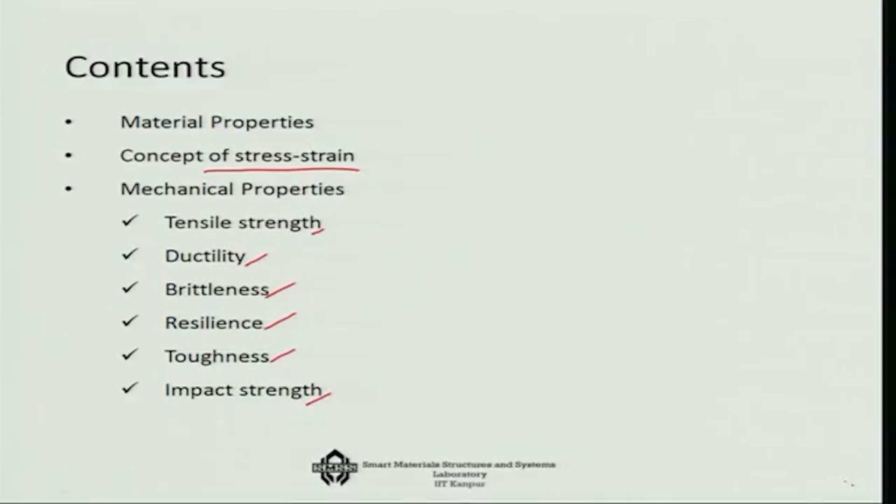So, first of all, let us look into broadly the material properties. In the last lecture, I have told you broadly about the domain of materials. Now, we are talking about the material properties that one has to consider. So, towards that direction, we call it an 8 parameter based grading of a material. So, the first in this direction is, of course, you have to always keep in mind the economic and environmental effect, because if the material is very expensive, then it is of no use for a mass production system.

Just for an example, suppose you need a very high stiffness in a particular mechanical system. Now, diamond is having the highest stiffness, something like 1200 gigapascal. But can I make a mechanical system out of diamond? No. So, that is what we have to keep in our mind.

The diamond is, of course, an extreme example, but the price and availability is a very important aspect in terms of choosing a material. We will cover these things in one of the talks. I will tell you what are the current prices and availability of the materials in the Indian context. So, that is one important point, whether the price is affordable for a particular engineering system.

Now, say for example, you are making a screwdriver or you are making a nail cutter. The type of material that you can afford, in comparison to suppose you are making an automobile, will be definitely of inferior grade. That means, for products like an automobile or an aircraft, you can afford slightly higher grade of materials. So, that is why the price plays a very important role.

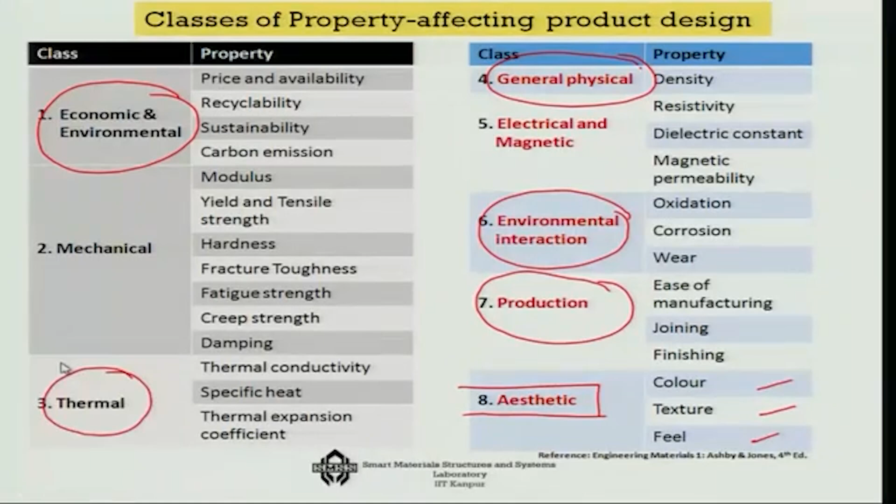So, that is about the overall material properties. Now, let us look specifically into the mechanical properties of the material. There is actually a very large list of mechanical properties, but I have chosen a few of the very important ones which you will need for day-to-day mechanical design: the strength of the material, the stiffness, which is actually governed by the modulus of elasticity, then the plasticity from the forming point of view, ductility and malleability.

One common point that you often come across is that ductility and malleability are not the same. Both of them refer to how you are deforming a material, mainly plastic deformation, but while ductility refers to deformation under tensile conditions, malleability generally refers to deformation under compressive conditions. So, ductility, for example, refers to whether I can reduce the thickness of a wire as I apply a large tensile load. Can I draw a very thin wire from a cylinder? If the material has good ductility, you can draw a very thin wire out of it. So, that is in the context of tensile loading.

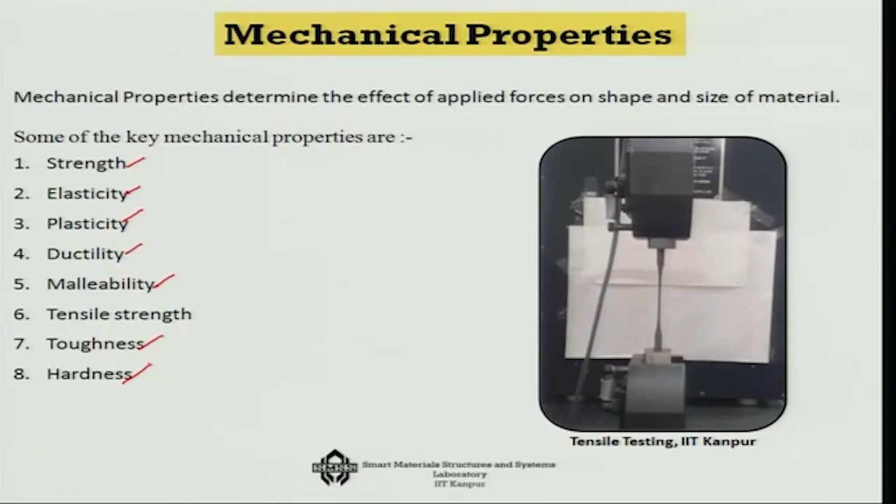Then of course, we talk about strength, specifically the tensile strength, because that becomes important, and the toughness and the hardness of a material. So, these are some of the mechanical properties which we will be discussing in much more details. Okay. So, before I talk about the strength, I should talk about the concept of stress and strain, which is very basic and important for any mechanical component.

Now, the way we will define stress here, which is the very elementary definition of it, is that it actually depicts the internal resistance per unit area in an average sense that acts on a material when you are trying to deform a material. So, for example, if you use a tensile testing machine, then you will be taking a sample where you are actually going to apply the force and deform the material, like you can deform it either in a tensile force system, where you are actually pulling it apart, or you are compressing it.

In both the cases, you have an idea of how much of force you are applying, and you know what is the area of cross section of the system, the initial area of cross section of the system. So, in an average sense, the force per unit area will give you the stress. Now, actually the SI standard unit is Newton per square meter for stress.

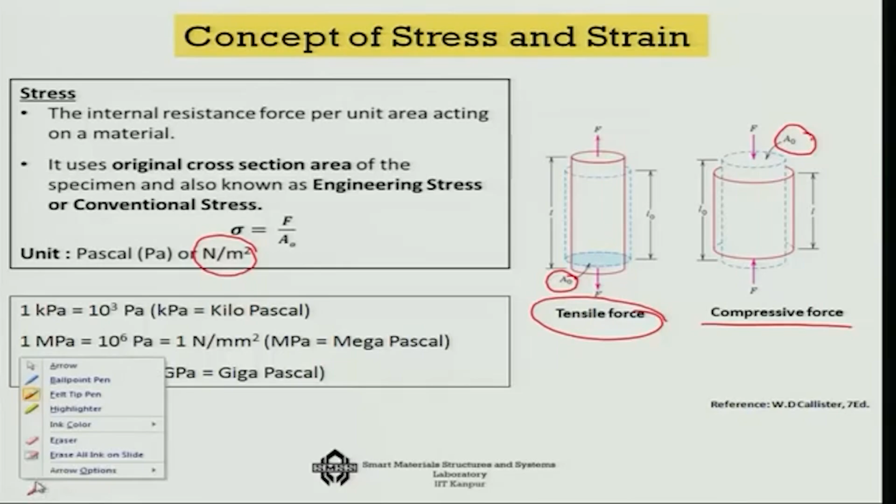So, thus you can understand what is stress, which is the internal resistive force averaged out for an area over which this force is working on, and the unit of it, that is the Pascal. Now, what is actually the strain of the material? The strain is defined in terms of the change in length per original length of the material. Now, here if we think that the area of cross section is not changing or the change is small in a certain range, then the strain is actually the engineering strain or a conventional strain or a normal strain, which is the change in length over the original length of the material.

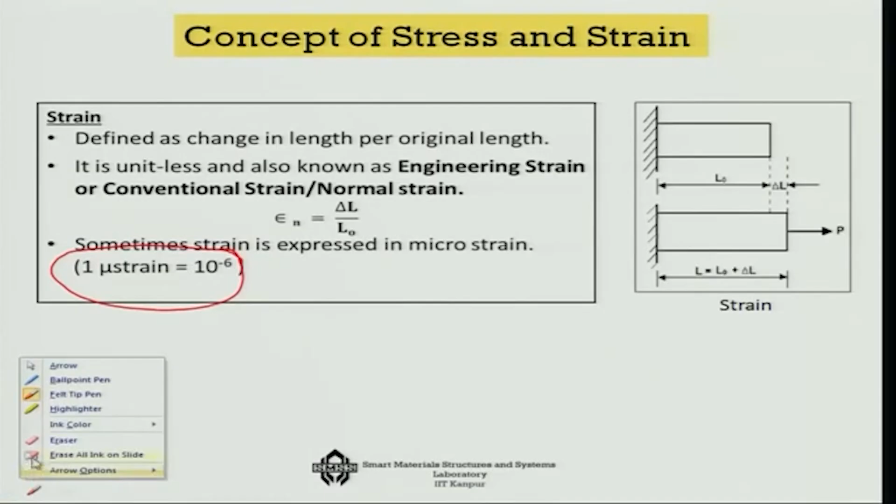So, that is what is your strain, and generally this strain is very small. So, the strain is measured in terms of 10 to the power minus 6, or micro strain. So, these are the two very basic important points about stress and strain that you need to know. Now, stress need not be always tensile in nature or always compressive in nature. There can be stresses which can be shearing in nature.

So, you may also express it as tan theta. Now, whenever this is very, very small, then tan theta becomes almost equal to theta, and hence for small strain condition, shear is often expressed in terms of the angle theta. Okay. Now, there are many day-to-day examples.

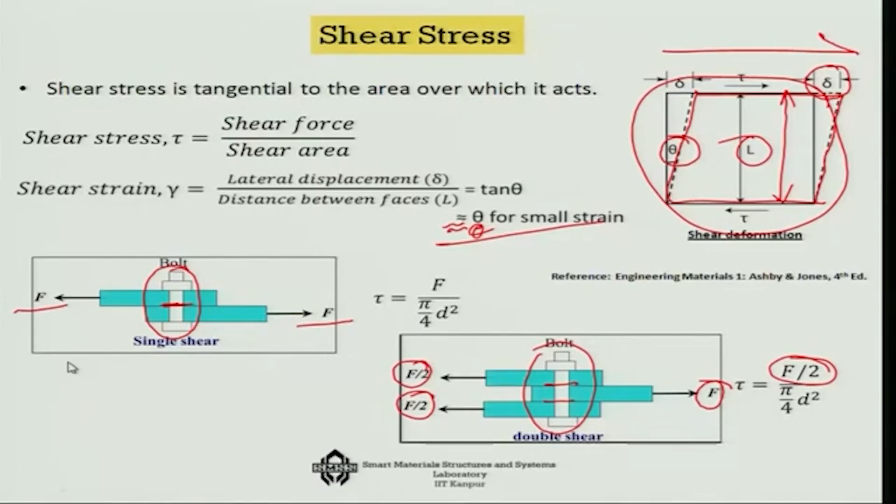So, you can make many such changes intelligently in a system, so that the shearing stress comes down, and thus it gives you a stronger system with a better life. So, that is what is the shear stress. Now, there is also another manifestation of shear stress, we call it pure shear. This happens in terms of torsion, which is a variation of a pure shear.

So, this kind of relative movement between the two surfaces is standard of any torsional situation, and they are generally governed by a standard relationship for very small twisting angle. When the twisting angle is not very high, torque over the polar moment of inertia, T/J, equals the shear stress tau over r, and that equals the shear modulus of elasticity G times phi, the angle of twist, over the length L of the sample.

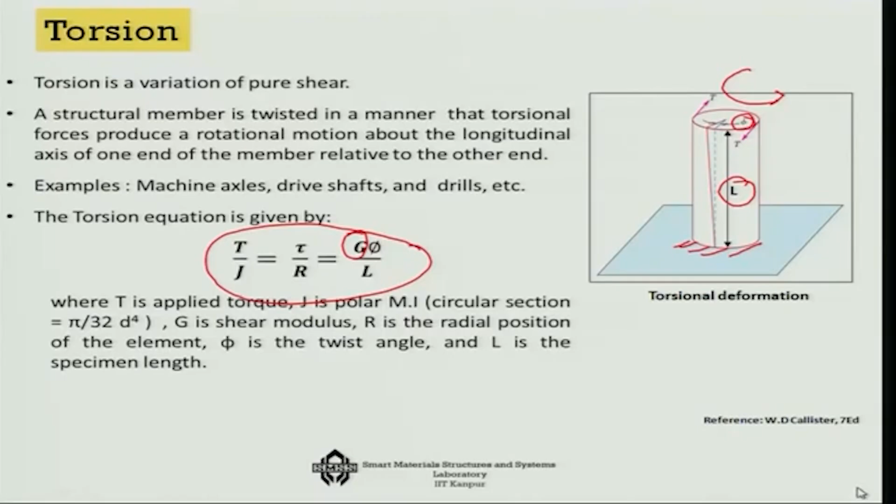So, one can find out the shear stress corresponding to the pure shear condition, provided you know the shear modulus, the twisting angle, the radius of the shaft and the length of the specimen. So, that is a special manifestation of shear, which is called torsion. It is important in machine axles, drive shafts, aircraft wings, or drills, where torsional systems are very heavily used.

Now, what are the other common states of stress? In day-to-day experience, you must have seen simple tension in pulley based systems, or simple compression in something like a column. But there are other cases, for example, a balloon or such hydrostatic bodies where you get a biaxial state of stress, expansion and contraction, or hydrostatic pressure, or cases of pure shear. So, these are all cases of stress in our day-to-day experience.

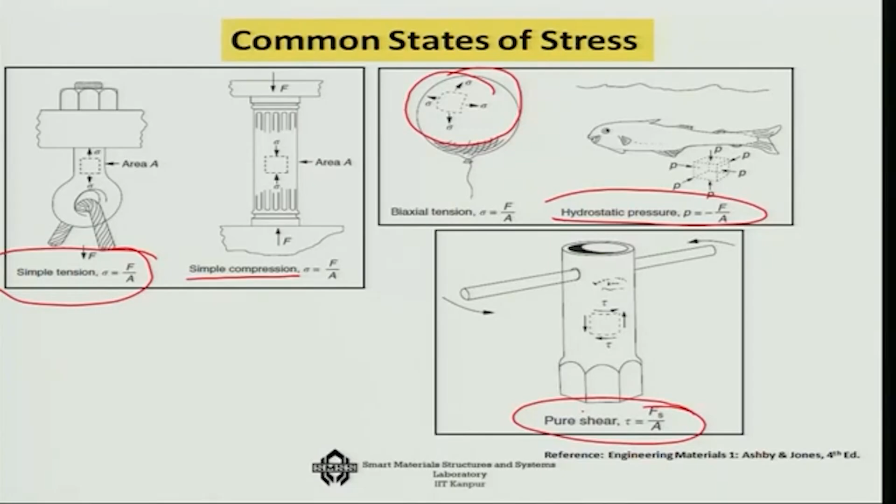So, these are certain common states of stress, and this is where we will finish today's lecture. In the next lecture we will talk about the concept of stress and strain and the constitutive relationship in much more depth.